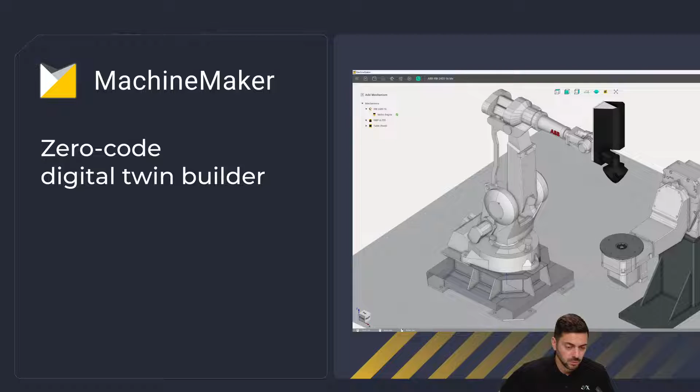So in order to program a robotic cell properly in offline mode, in the standalone software, you need to have a digital twin of this robotic cell. For this purpose, we offer a product called MachineMaker, which is a zero-code digital twin builder for robotic cells and CNC machines. CNC is not the topic today, but for robotic cells it definitely is. You can use MachineMaker to build whatever robotic cell you or your customer has, in order to program it with ENCY Robot.

MachineMaker features not only a builder but also a components library, available online. We're always working on adding more components, but it's also possible to build your own components with MachineMaker. If you don't find a component—maybe a robot, an end effector, or a positioner—you can build it yourself with MachineMaker, no problem.

The main application area for MachineMaker is to build virtual robotic cells or digital twins. That's obvious. And last but not least, MachineMaker provides user-friendly input of TCP and base calibration data. This is a completely different, separate topic.

I think if there's demand, we'll make a separate webinar dedicated to TCP and base calibration, because we have an app called Robot Calibration, an assistant for the double spike calibration method. Unfortunately, during this webinar I don't have the possibility to show you this whole process because it takes quite a lot of time to demonstrate. But if you want, we'll make a separate webinar—write it in the chat if you need it.

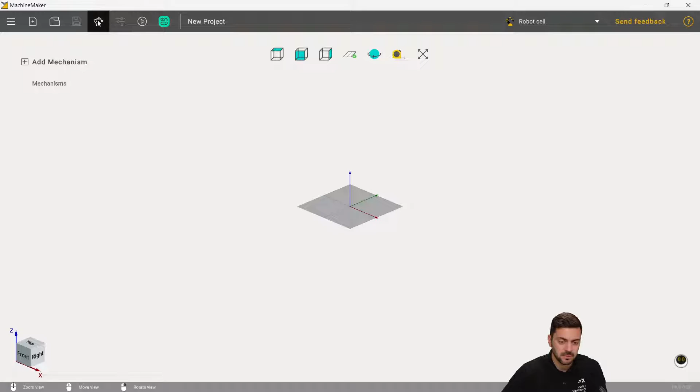I'll use the online library—you can find it here. Let's take a look at what we already have. For example, we have ready-to-use robotic cells. I can just open one and adjust it to my own taste.

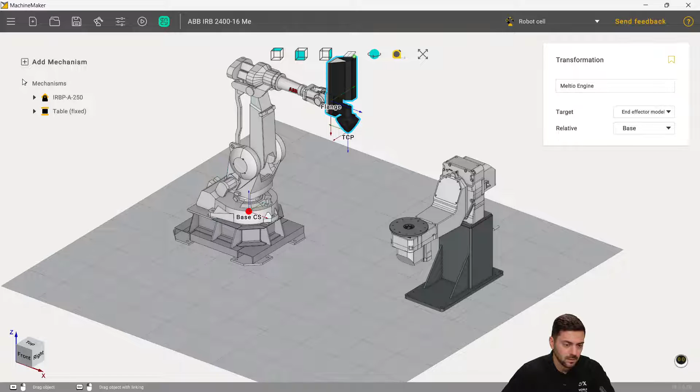All the usage of MachineMaker is very intuitive and user-friendly, so you can just drag and drop objects, or of course manually move objects like this. What's important here is that on the left you have all the kinematics defined for your robotic cell.

Let's say I'd like to add a new component—no problem. I'll just find some, let's say, whatever fence, and put it in my robotic cell in the correct position I want. This is very easy to use and a user-friendly tool.

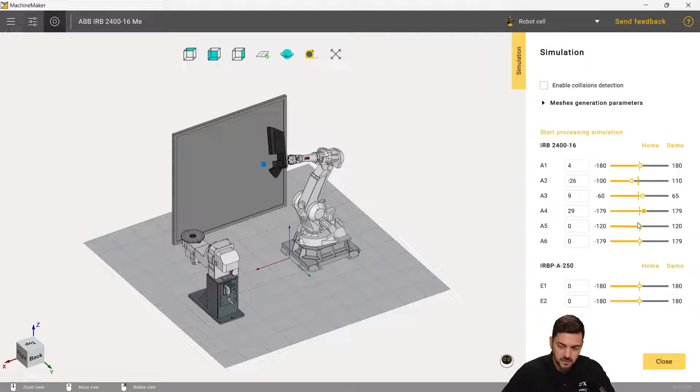And of course, we can move all the axes here—so it's not just a 3D model, it's a 3D model combined with a kinematics model, and all the objects here are already moving. You can check it, like this.

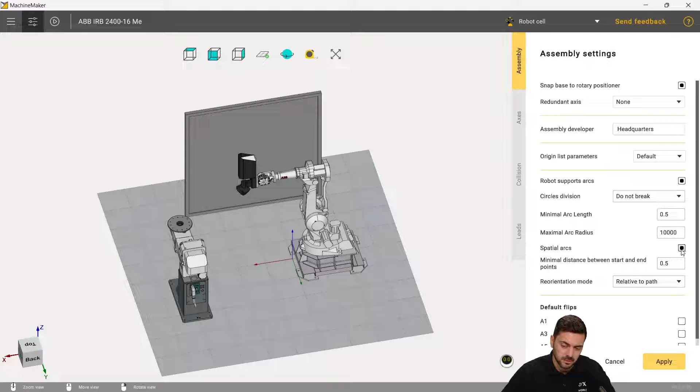What's also important in MachineMaker is that we have settings connected with what we call assembly settings, related to the behavior of different coordinate systems and axes during programming. For example, whether the robot supports arcs, yes or no—you can enable or disable it here. Does it support spatial arcs, yes or no, and so on.

There is also a section for definition of leads, or approaches and retracts. You can define your own approach and retract rules, which will be used by default, and add your own ones. So this is not only a tool used to put objects in the right positions, but also a tool to prepare your full digital twin, which is now available for programming with ENCY Robot.

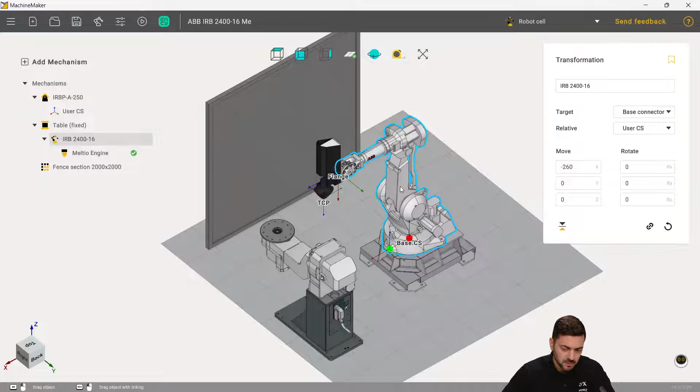What's important to say is that every component can be accessed with a double click. Here is the kinematics, so I can adjust the kinematics of any component. I can change dimensions, I can do whatever is required. All the measurements are editable, so you can change whatever you want. It's a powerful tool. Be careful, it's quite easy to destroy something, but it's also easy to use, so I think you will not experience many problems with MachineMaker. It's really easy to use.

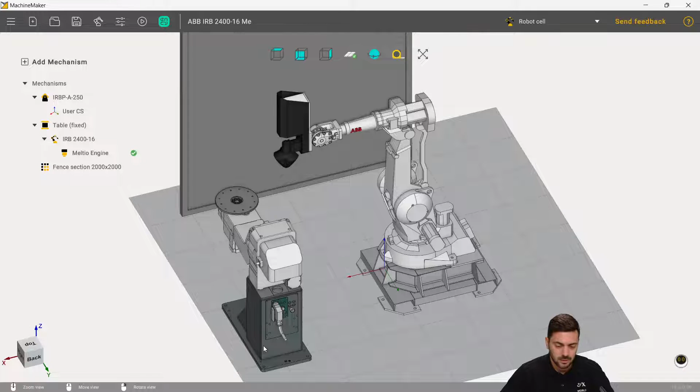We have seen many times that customers who just downloaded a trial version from the website have managed to learn how to build their own robotic cell, and during their trial period they already have their robotic cell. So they're testing the software not on some abstract robotic cell but on their exact robotic cell, and they can do it from scratch in maybe several days. So I think you also can do it.

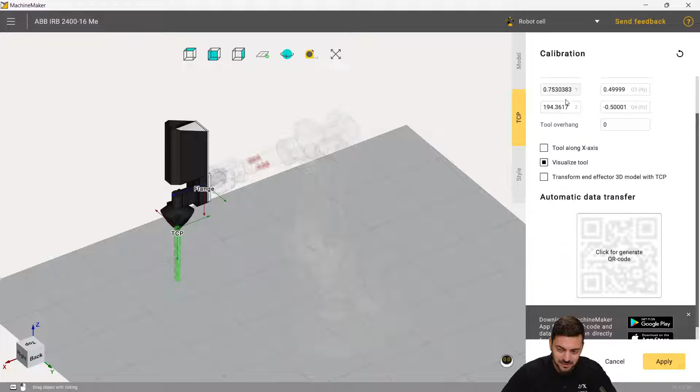The last thing I would like to show you now is that here you can also input TCP calibration data. Here you can see the QR code, which is made for automatic data transfer from the app, which you can download here, please try it. It's a really nice application which makes life easier, so you don't have to manually input 6 numbers, maybe sometimes even more, like here you have 10 numbers, 10 digits. So all this data is transferred automatically from the app, and the app is used to recognize the numbers from the robot controller. You just take a picture and transfer these numbers into MachineMaker.

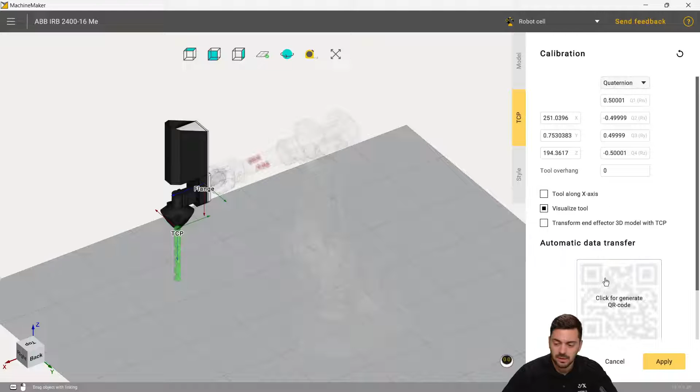Here you can also see that we have support of different types of robots. Some of them work based on quaternions, some of them work based on Euler angles, so everything is supported. In case we have some specific scenario or specific robot which for some reason was never requested by our customers, you can always send us a request, and if something is not supported, it's no big deal to add support for a specific robot. So feel free, if you don't find your Euler angle combination, for example, send us a support request. We will put this into MachineMaker and also ENCY Robot.

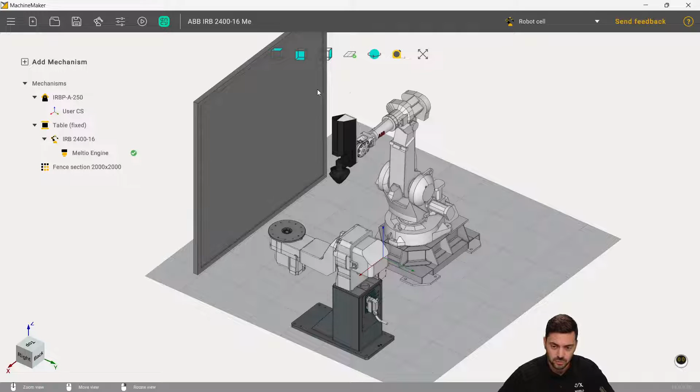The last thing I would like to show you concerning MachineMaker is that on our website encycam.com you can find a component library, and all the components are available. So you can check what we have in our component library and check the specifications, and here you can download the digital twin of the specific robot. But actually you don't need it, because you have the same library here. So if you have it online on the website, you have it here in MachineMaker, so you don't have to worry about downloading and loading something. Just open MachineMaker and use the same online library which you have on the website.

Concerning the trial version, I have the question. I will answer it right now. Yes, everything is available in the trial version. MachineMaker and all the applications, all the technologies in ENCY Robot are also available for trial. The trial has only the limitation that it's 30 days, and you cannot run the trial license twice on one PC. So don't try it.

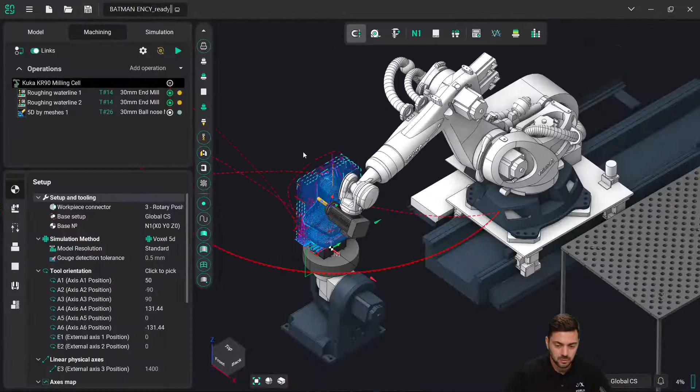So the next topic and next big section which I would like to cover is ENCY Robot itself. Let's take a look at the project, and on this example, what do we have here? On this example I would like to show you some really nice kinematic management and collision avoidance features which we have.

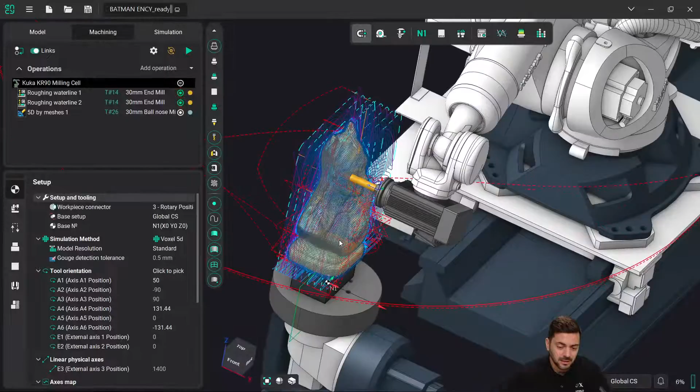But first, for those of you who have never contacted us before, I would like to say that for robot programming we have the full range of toolpath calculation algorithms for milling, for welding, for additive manufacturing, for probing, and so on. A lot of technologies are available, so you can program almost any robot movement, and also, which is very important, the end effector. Sometimes you have a simple end effector like this which has only on and off commands, maybe a spindle speed command, that's it. But in many cases you have a really complex end effector, used for example for additive manufacturing, so you can output commands which will also control the end effector equipment on your robot.

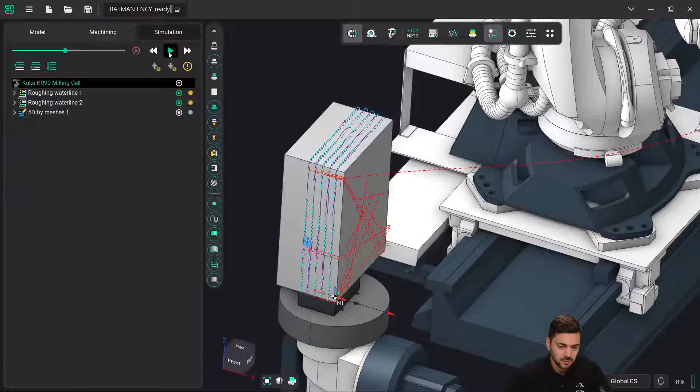Okay, so this is a milling project. Let's take a look at the simulation first. It consists of 2 roughing operations and 1 finishing operation. Looks quite simple, but if we take a look at this robotic cell, how many axes does it have? The robot has 6 axes itself, then we have a rail which is 7, and we have a 2-axis positioner. All in all we have 9 axes in this robotic cell, which is quite a lot.

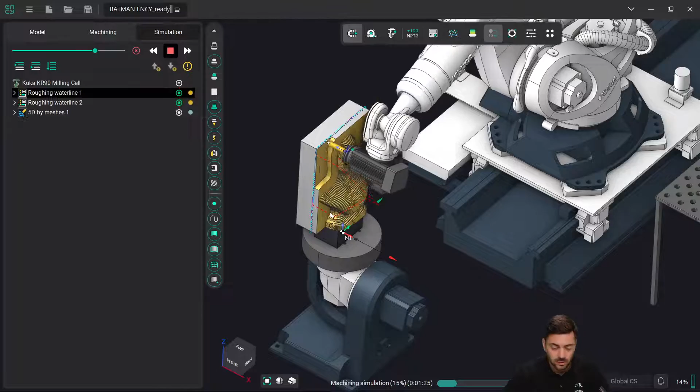The main challenge concerning robot programming, comparing to CNC machines, and the main difference is the kinematics management. Because even if we speak about 5-axis toolpath, it's only enough to have 5 axes to execute this toolpath. So what to do with other axes? You have like at least 6. So in this case, when you have additional axes, you have to define some algorithm which will control the redundant axis behavior during toolpath execution, which is not directly connected to the toolpath itself. This may look like quite a complex concept, but when you look at it in a visual way, you will understand very fast.

For example, let's take a look. Here we have 2 operations which are basically only 3 axes. So we don't even need 6 axes, and of course we don't need 9 axes to make this toolpath execution. At the same time, we can do the same toolpath in many ways. The robot can be configured in different positions and different configurations, and still execute the same toolpath.

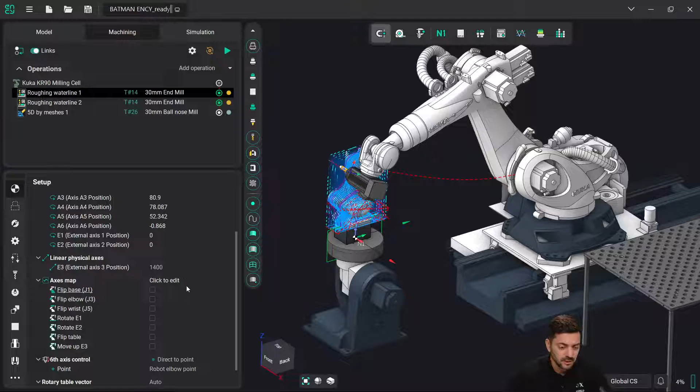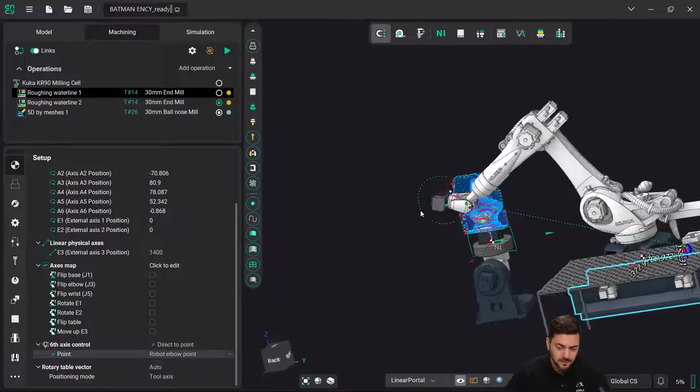In order to control this behavior of additional axes, we have several tools. For example, this one is simple. You can define the magnet point, which will be used to control the position of the 6th axis of the tool during toolpath execution. So you can say, I have the magnet here, so the 6th axis is controlled in a way so that it is aligned with this vector. This is quite an easy tool, but still very powerful. In many cases it's enough only to have this.

But there is also an option you can use in cases where you cannot use only a simple magnet, so you need to change this behavior during toolpath execution. For this scenario we have a robot axis map. It may look a little bit overwhelming, but once you understand the idea, it will be very easy to use, and it's very visual and very intuitive.

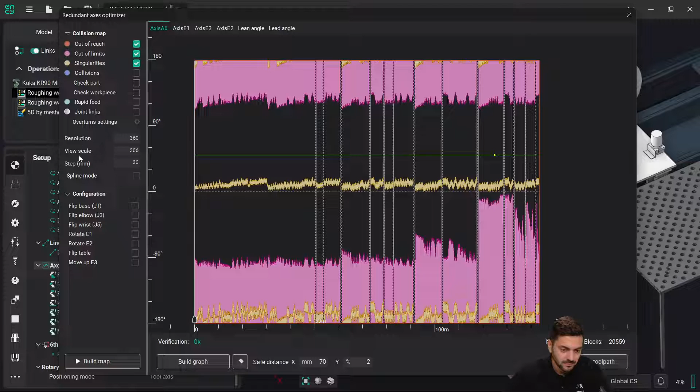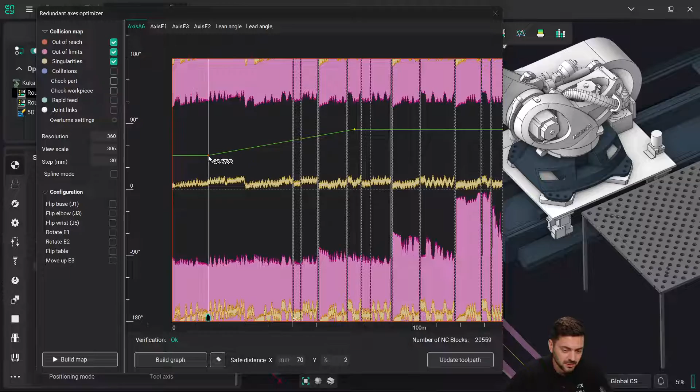So what do we have here on this graph? All the colored areas are bad areas. Along the x-axis we have the toolpath. Along the y-axis we have the angle of the 6th axis of the tool. This green line is the trajectory of the 6th axis of the tool, which you can define throughout the toolpath execution. It's very easy to understand when you look at the same time at the simulation, at the graphic window, and on the robot axis map, and move it like this.

So in every point I can change the position of the tool around the tool axis, and you can understand that the result of these changes will only be visible on the kinematics of the robot. The toolpath itself is not changing. So with this tool, you are not influencing the toolpath itself. You are changing the behavior or the kinematics of the robot throughout the toolpath execution.

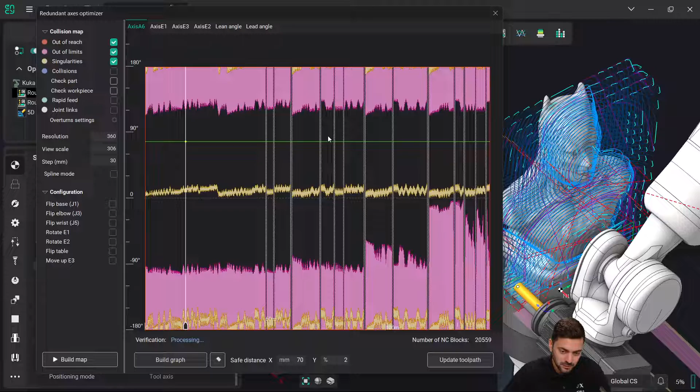And visually, the task is very simple. You need to go from left to right without crossing any colored area. That's it, a very visual tool. These gray areas are actually the links, the transitions. They are part of the toolpath, shown so you understand that in these areas you have non-cutting movements, for your information. So you can cross them, of course, inevitably. It's okay.

So with this robot axis map, you have full control over your redundant axis during toolpath execution. And you can change not only the sixth axis of the tool, but also the behavior of all the redundant axes, all the additional axes which you have in your robotic cell.

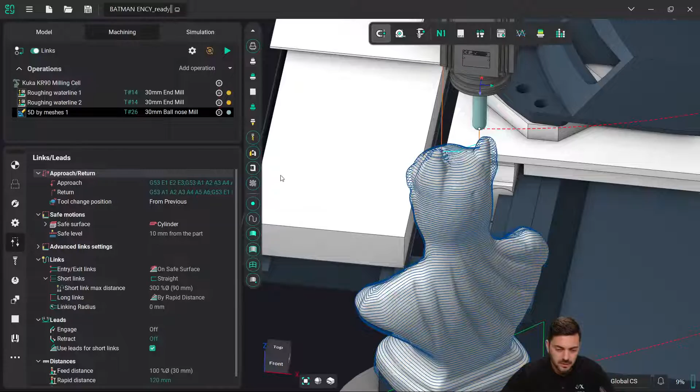So let's say we have this kind of process. First we make a roughing waterline from one side, then we have a roughing waterline from the second side, and we need to make a transition between these positions.

You can already see that on approach I have collision avoidance enabled. I will disable it for a moment, and let's see what happens.

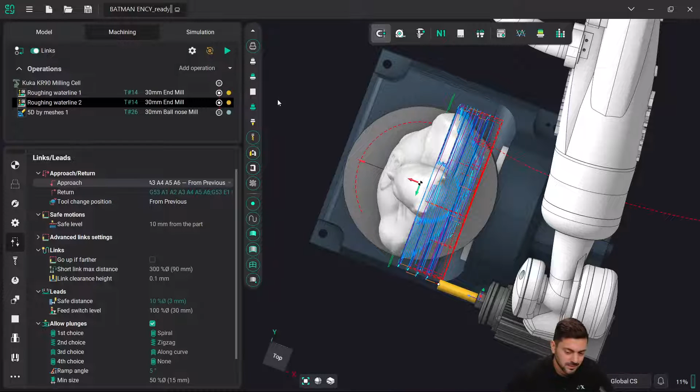In order to see, we are switching to simulation, and I will quickly go through the simulation of this roughing operation, which you can also enjoy. I believe it works very fast and very detailed. By the way, I will enable stop on errors so we can catch the exact collision situation and take a look at it.

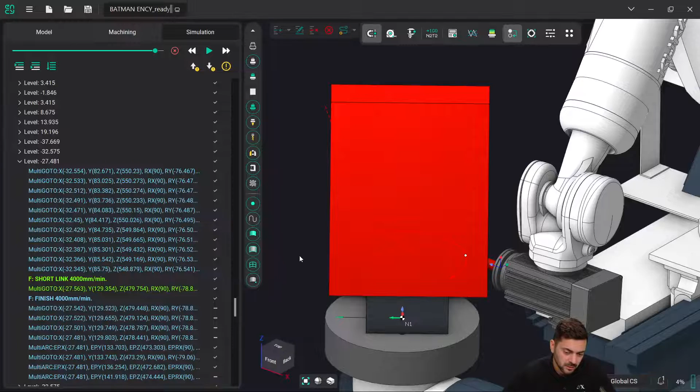By the way, for those of you who see our product for the first time, on the left you can see the program actually. This is the program which was calculated in the machining tab. In the simulation you can simulate the program you have just calculated. So this program is already usable for this particular robotic cell, so you don't have to use some other software to transform your toolpaths for robots. ENCY Robot is a complete solution, so you don't have to use any other software to adapt your toolpaths for the robots.

So we have a situation. This is definitely a collision. The collision avoidance algorithm detected the collision and tells us, okay, we have a problem here. So how can we solve this situation?

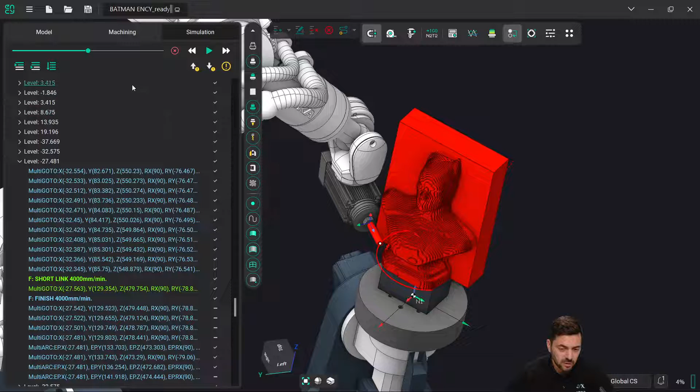There are many ways of how we can do it, but the most easy and effective is to use automatic collision avoidance. So I will just avoid collisions and recalculate the toolpath. We'll have to wait a little bit for toolpath calculation, sorry.

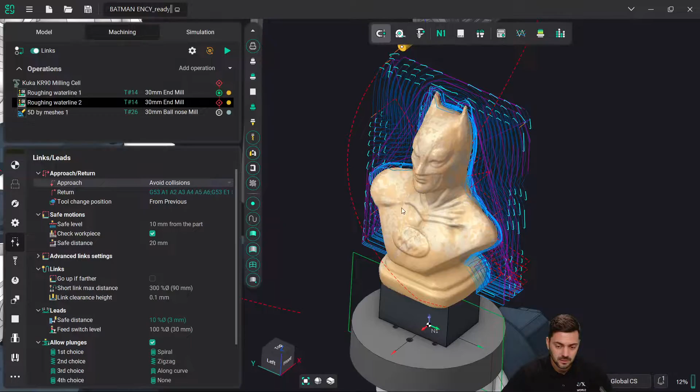So basically what this collision avoidance algorithm is doing is that it detects the collision during the transition, and it's looking for new points and adds new points to this transition so that it becomes collision free.

What's important to know about collision avoidance: please do not use it everywhere, because it will inevitably increase your toolpath calculation time. In order to use it in the most time-effective way, just enable it in those transitions where you have collisions.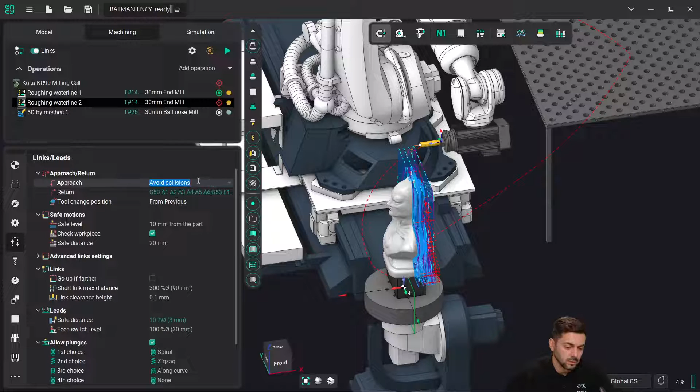For example, in this operation, we have collision at the approach, but we don't have any collision at the return. So we don't need collision avoidance at the return, we need it only for approach. So I will reset the status, and now let's take a look at this approach.

You can see now it's different. Instead of just one movement, there are now several points, and it gradually moves, avoiding collision with the workpiece. Let's take a look at slow speed how it looks now.

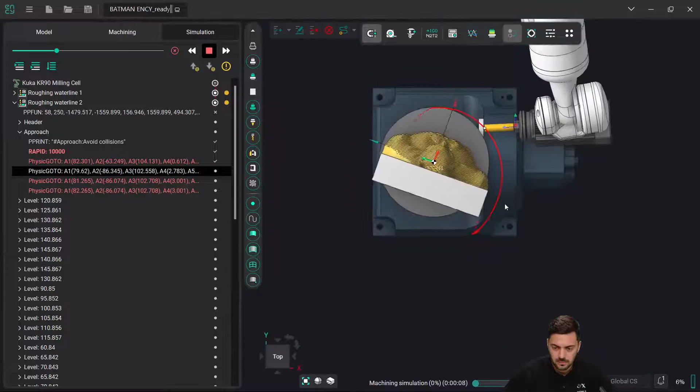It may seem to you that here the distance is too small, so you can put this safe distance, put here a bigger number, and you will get bigger clearance between your objects.

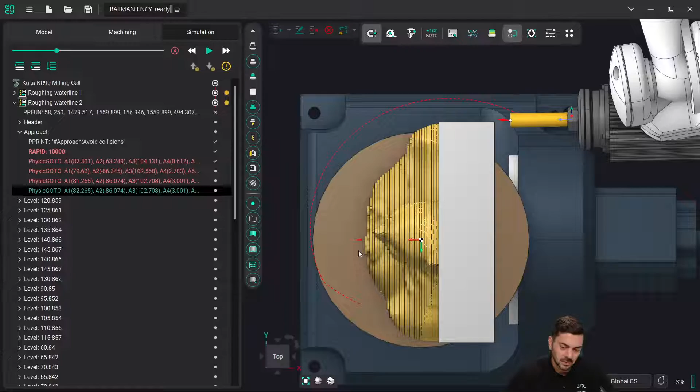What's important to say is that this collision avoidance algorithm takes into account all the objects within the work area, including the current state of the workpiece. It's very important, because your workpiece may change during toolpath execution, and collision avoidance should take into account the current workpiece state. So exactly what we can see on the screen, exactly this shape, is taken into account for collision avoidance.

Okay, and now we can run the second roughing part. Very fast, and after that I will show you the last thing in this project, and we will switch to the next one.

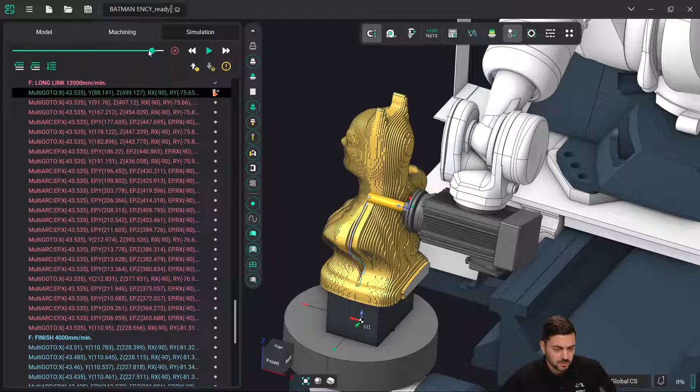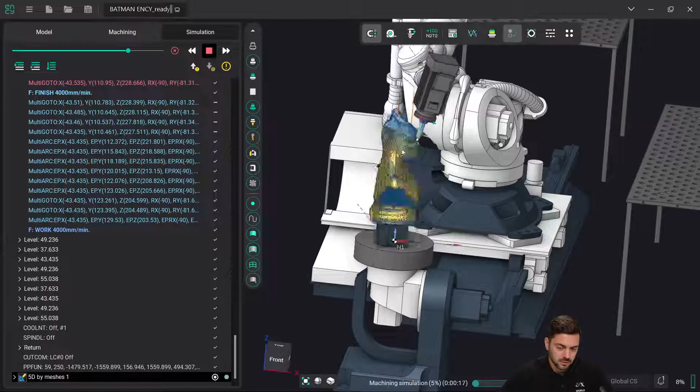So after the roughing is done, the next stage of this project is actually the finishing. The finishing is a completely different situation, because it's a 5-axis toolpath which includes rotation of the table and also inclination of the tool, so that it machines this shape, which is very complex for a CAM software, and we still have no collisions.

By the way, you can always control your robot movement with your control panel. You can see all the 9 axes here, coordinates. So of course now we have a 7-axis toolpath. Our E1 and E3 are not involved in this toolpath execution, because we simply don't need it, but all other axes are working simultaneously. So you can control it in the machine control panel, which I believe is quite spectacular.

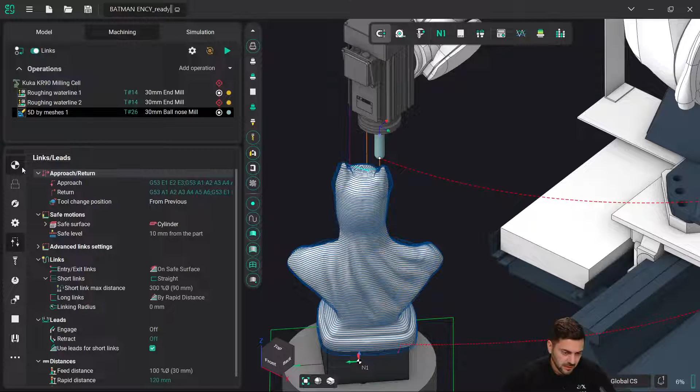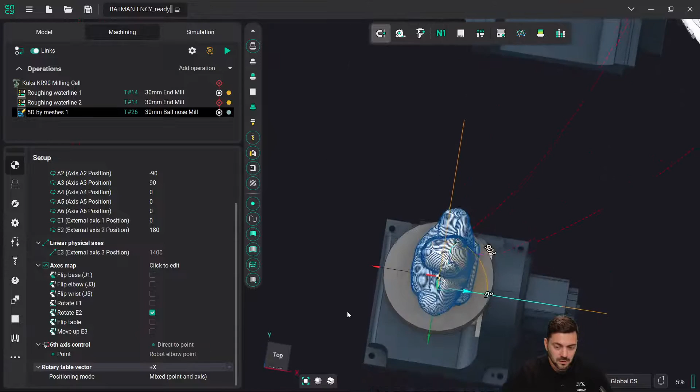So what do we have here for kinematic management? Due to the fact that this toolpath is 5-axis, and we want to optimize the execution so that the robot is not going around the workpiece, but as much as possible stays on one side approaching the workpiece, all this round movement is done via the rotary table. So we engage rotary table rotation here, and we must define this rotary table vector. This blue vector defines from which direction the tool will approach the workpiece, the table.

So you can change this vector, set to +x, or you can put a custom vector. You also have a positioning mode, which is another flexibility that can be very helpful in different situations. You can position the tool axis, tooltip point, or mixed. Try it at home, I advise you, and you will see the different behavior of the robot during toolpath execution.

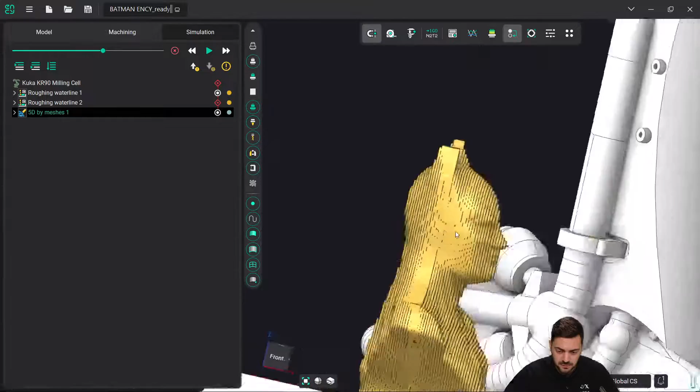If we take a look at the simulation, let's set it up like this. This is the workpiece which we have after our roughing operations, and if we run now the simulation of this finishing operation, we will see. Let's move it a little bit faster.

We can see that the tool contact point, this white one, is aligned with the x-axis. It is now moving according to the rule which we have defined in the rotary table axis parameter.

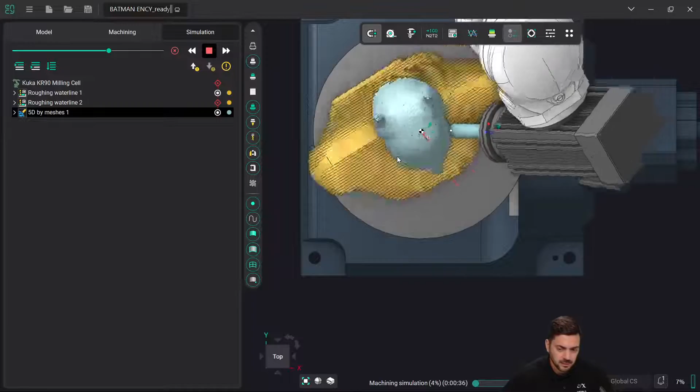So all these tools are made to define some additional limitations or rules for redundant axis. This is specific for robots. Sometimes CNC machines also have this necessity, but mostly this is done for robots.

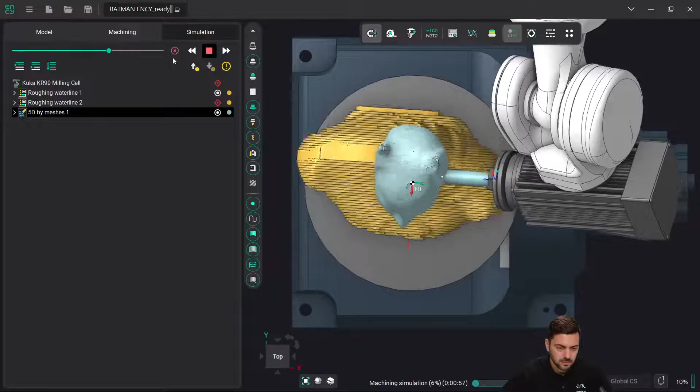Very nice to look at, but we should switch. From the first point of view, this is a really simple project. We have just a big cylinder and we need to make these little holes in it, so we have only one operation for drilling, and also here we have a rotary table.

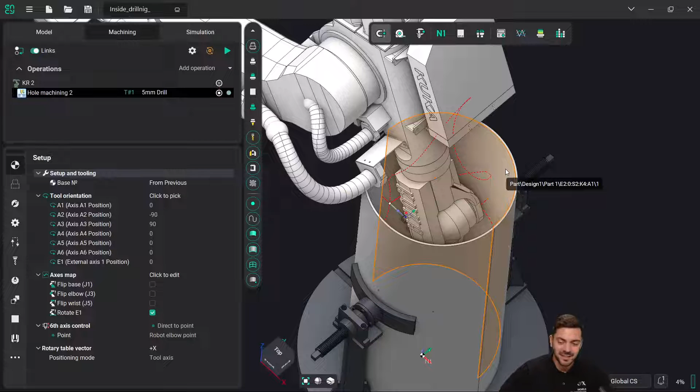It might seem easy until you understand that you have to manage the approach and the retract in this situation, when you have a very tight area inside this tube and a very big robot which must fit there and not crash during this movement.

This is a very nice example of how collision avoidance is working. So first I will turn it off and we will see what happens.

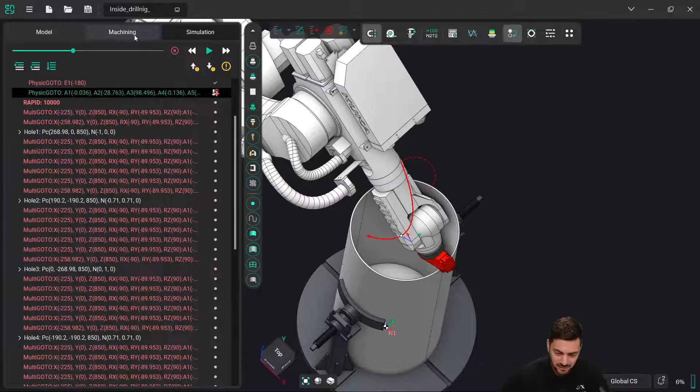All seems okay, but when we start simulation, we have a problem here. The problem is not only that we have the collision, but also we have a 7-axis movement simultaneous. I don't think you want to program this by hand in any scenario. Of course, you can move it one by one, but it will not be time effective.

So in this situation, the perfect solution is a collision avoidance algorithm. Let's engage it and calculate the toolpath again. Now, like you see at the bottom, we are eliminating the collisions. After that, in our approach, we have several movements you see now on the screen, which are helping us to avoid the collision.

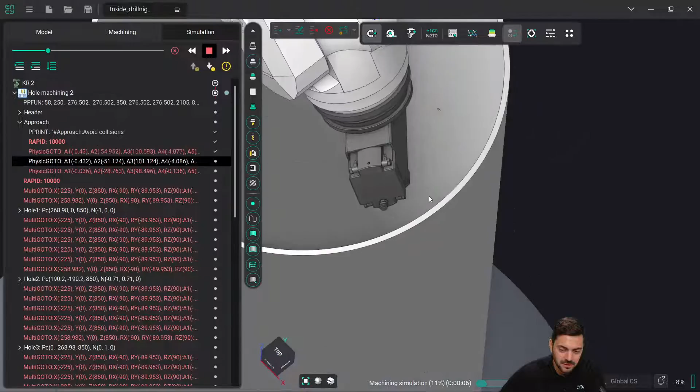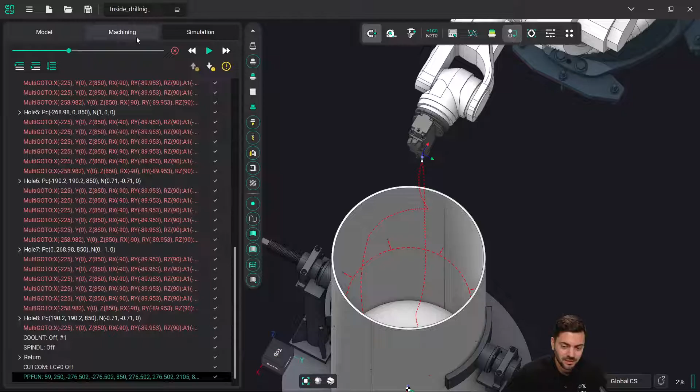And the robot fits in a very tight area. You can control in simulation with very high precision how the robot is moving inside this workpiece and making the machining. This is an example of how you can save a huge amount of time just with a couple of mouse clicks, when you need to use your robot within really tight areas and maximize your robot's potential to reach really hard to reach points or areas in your project. So that's it.

Now something new which we have not shown before, and this is a new feature for ENCY: weaving. Weaving for welding first.

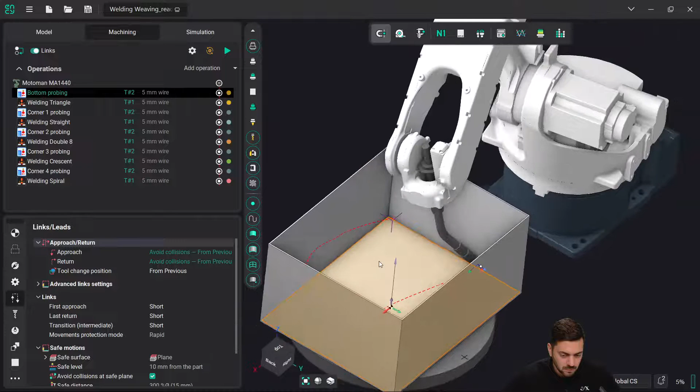So before that, for quite a lot of time, many years, we've had our welding robot operations in our software. But now we have implemented this weaving feature, so you can add different weaving patterns in your toolpath, and they are simulated, so the collision detection is working for them also. In these tight areas, when you have the nozzle of your welding torch, you can control so that it is not touching your workpiece in any scenario.

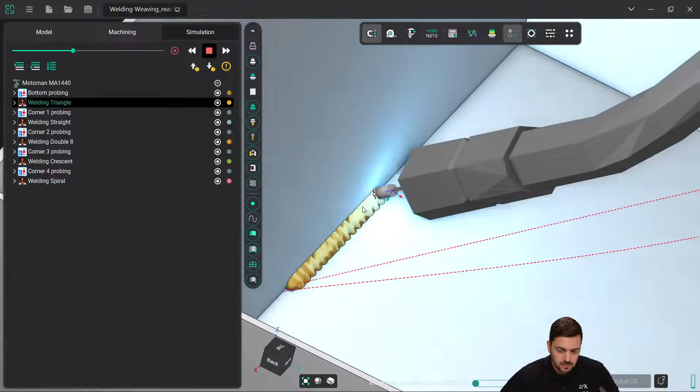Let's take a look at how the simulation works. I think it's quite intuitive and visual, you can understand anything. Also here, the additional axis is involved into machining to optimize robot movements.

In this project we also have touch sense and different weaving patterns. We can also see the weaving itself. Let me show you — the touch sense is finished, and the weaving toolpath itself can be observed.

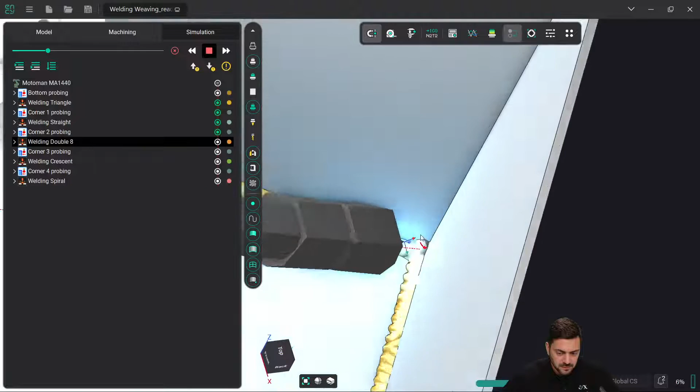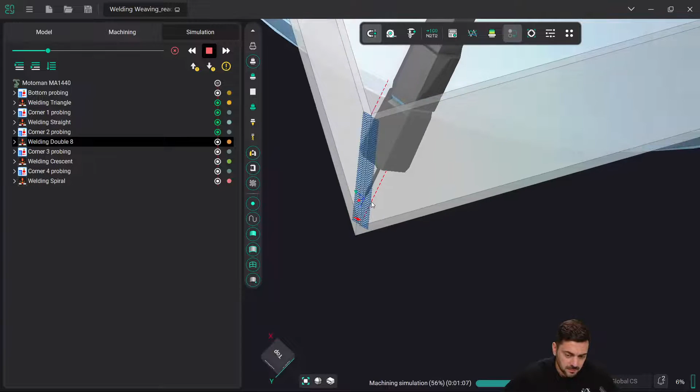Let me just make it like this. I will put some transparency because it's inside of the part, so you cannot see it otherwise. You should either disable your part visibility or enable transparency so that you can see from the inside. Okay, we have double 8 here. So let's have a quick review of what other weaving options we have.

So here we have triangle, trapezoid, spiral. Let me show you the pictures also. So triangle, trapezoid, spiral, double 8, curvy, crescent, and you have the parameters to define this geometry.

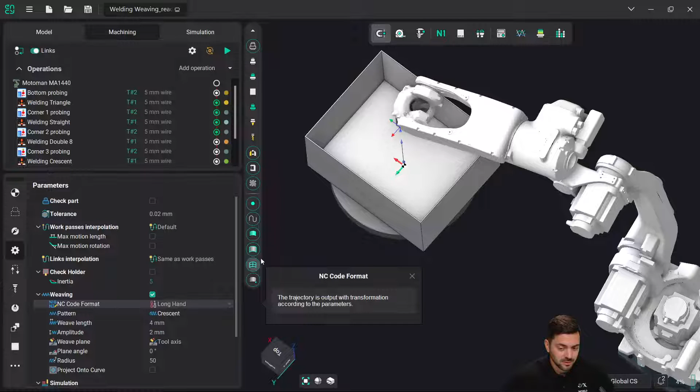Also, what is in our opinion important for welding is that you have an option how to output the NC code, the control program. Either you can export NC code longhand or in a cycle. I believe for welding you will be using cycles because the welding system itself has cycles and it's better to use these cycles. But when using these cycles, you still have the possibility to simulate the welding with weaving, which is very important. And also define the parameters here, and then in the post-processor you will use these parameters for definition of the welding weaving cycle.

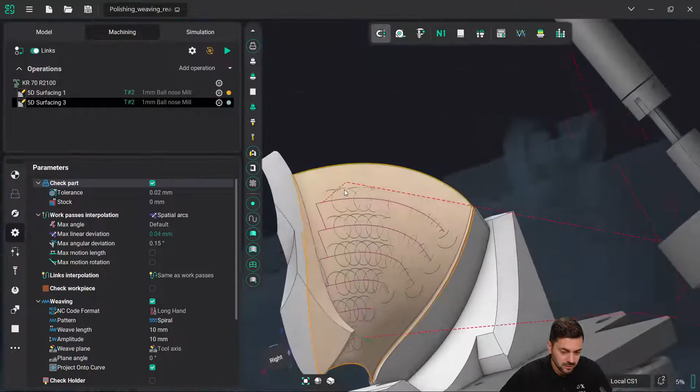Another application for weaving is polishing. Polishing is a different animal, while welding can also have a very complex shape of the surface, but for weaving, for polishing, you will have a really complex surface shape, I think, always.

Let me also turn on transparency so that we have the toolpath visibility. What's important, and the difference between weaving for welding and for polishing, is that for polishing we have this feature which is projection of the weaving onto the surface. So all these weaving patterns are now projected and aligned with the surface in every point, so you have a really quality toolpath for polishing with this.

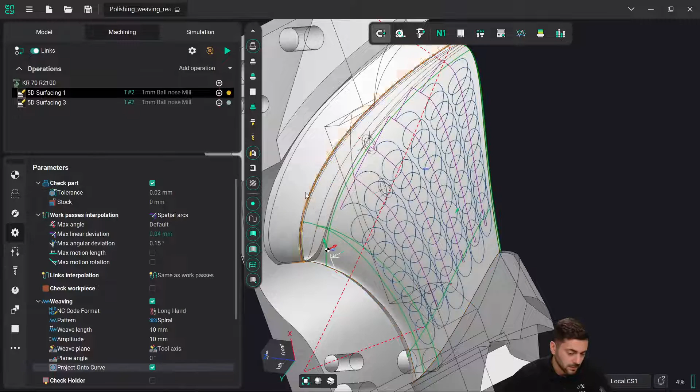Let's take a look at simulation really fast. I will disable machine collisions because it's a polishing toolpath, so the tool is inevitably, you see, trying to go to the part if you speak in terms of material removal, but we understand this is a soft tool and we don't need this collision detection. So this is weaving.

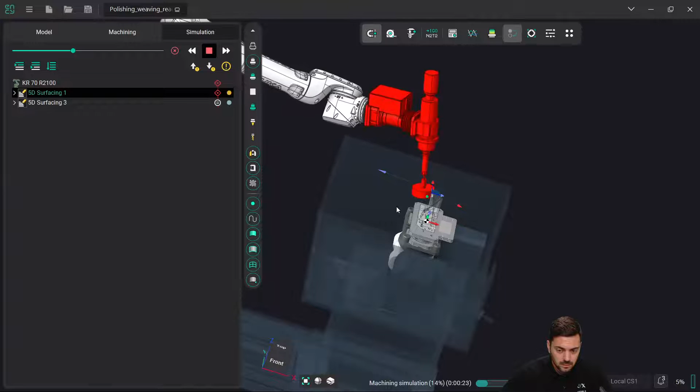You can see that the robot movement is very complex, but it's programmed really easy, so you don't have to do anything manually. You just define your weaving pattern, geometry, and you have the result.

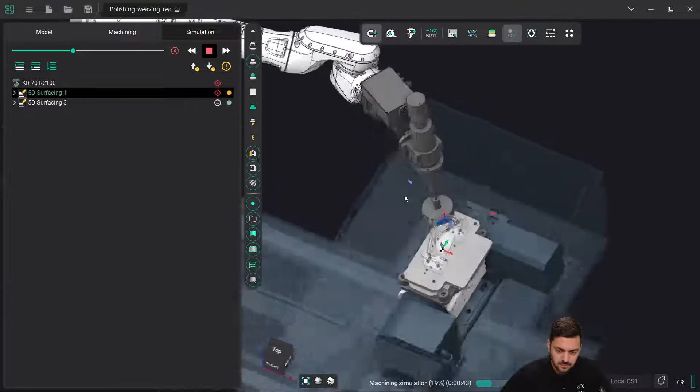So don't worry about this red collision detection, I just didn't turn it off for this demonstration. In this particular scenario, the part itself is very complex. It's some kind of blade, or I don't know what it is, but it's a very complex shape of the surface, and all the weaving pattern is ideally projected onto the part so that your toolpath is correct for this particular part, so you will get good quality for this particular case.

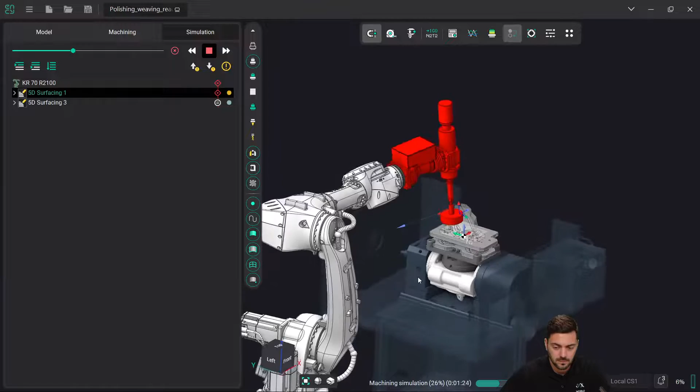To me, it looks very nice. Yeah, all the robot movements. We can also engage the machine control panel, so we understand what are the coordinates.

Okay, we can look at this forever, but we have limited time, so let's switch to the next thing. This is additive, non-planar additive functionality. This is also new, so let's take a look quickly at the project. I would say that we are still working on development of this algorithm and this slicer, but it's already here. You can use it, and it's really powerful.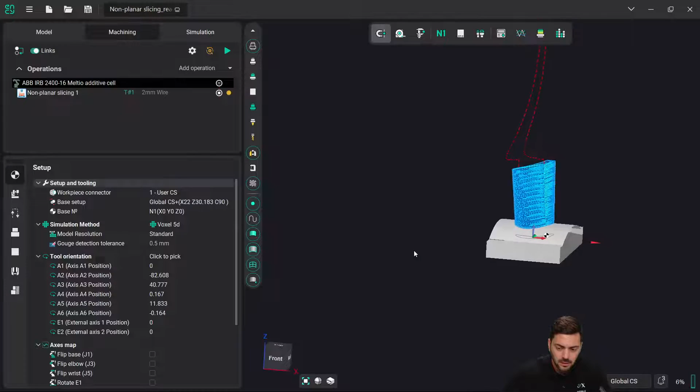So what we have here, let me turn this on, is we want to create or build with additive technology this complex shape on this non-linear, non-planar surface. So non-planar slicing is generating non-planar levels and infills. Very easy to understand when we look at the simulation.

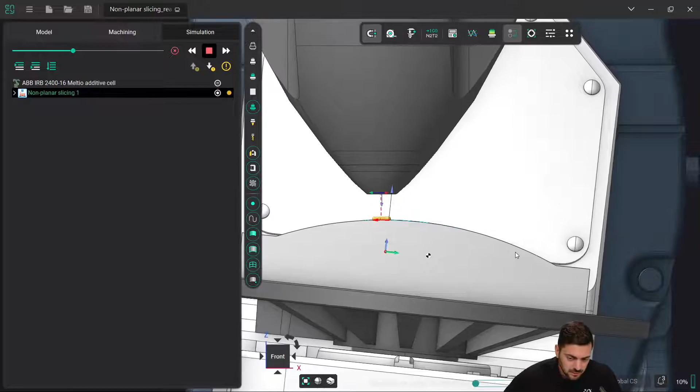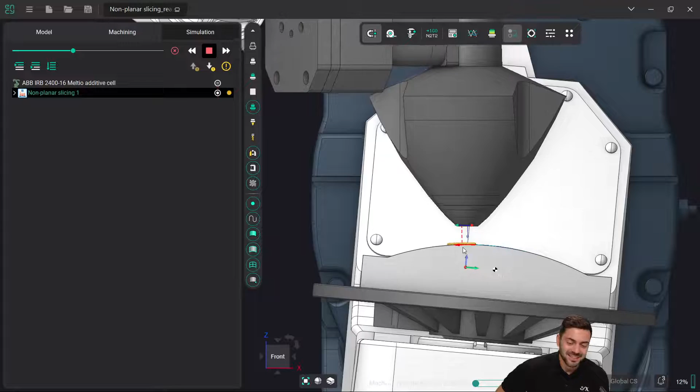Another interesting thing I must mention is that we can also define the kinematics of the robotic cell so that the tool axis is always vertical, because of the requirements of the additive manufacturing process. Due to gravity on Earth, in many cases we have to preserve the orientation of the tool axis for additive manufacturing strictly vertical. In this case, we have this two-axis positioner, which helps us preserve the tool orientation vertical.

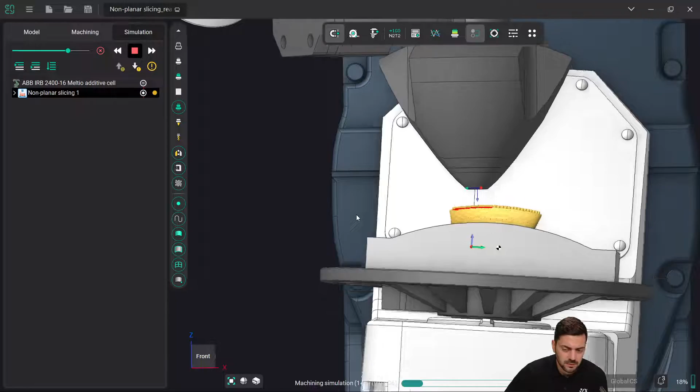While we're looking at the simulation, I would like to say that all the algorithms, all the toolpaths, and all the simulation algorithms are our proprietary algorithms. We don't use any third-party algorithms here, so everything is developed by us, and we believe this is the correct approach, because only by having control over all source code of the software can we provide a really good solution and maintain the quality.

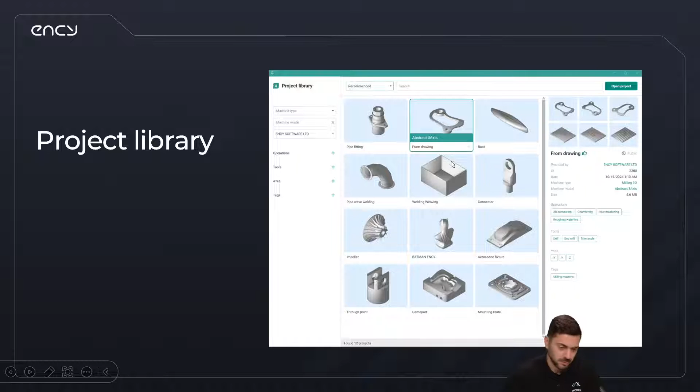So all the projects which I'm showing you, and even more of them, are available in the project library, which is an online project library for different purposes. You can install the trial version of ENCY Robot today, and let me show you, open the project library. Very easy.

Sorry, my PC is struggling with all this streaming software sometimes. Okay, so you have this project library. It's available for trial users also, and you can check all the projects I was showing you today.

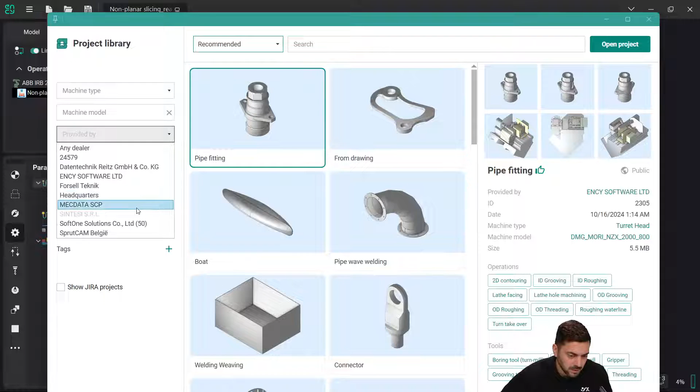Let me make it a little bit smaller. Okay, if you choose recommended here and provided by ENCY software, like this, you have this welding project, another welding project which is more interesting, the Batman project, and other projects which I was showing you today.

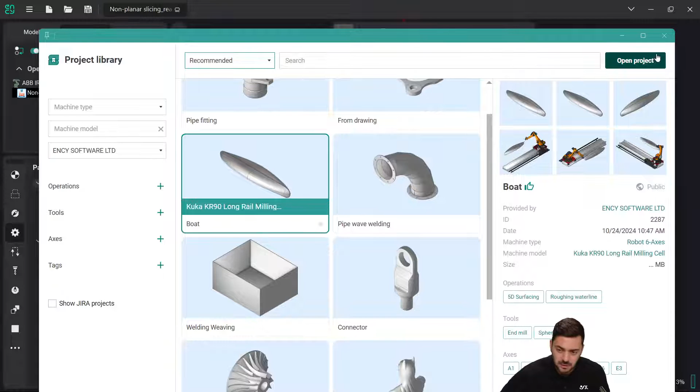So please feel free to explore these projects yourself. You can just click open project, it will download and open in your ENCY Robot instance within a couple of seconds. If you want to explore a bigger amount of projects, you can switch to all projects. Here we have 400 different projects, so you can explore yourself, and we have some filtering possibilities. Feel free to install the trial version of ENCY Robot and check all the demonstration projects in the project library. It's available for you if you have a trial license.

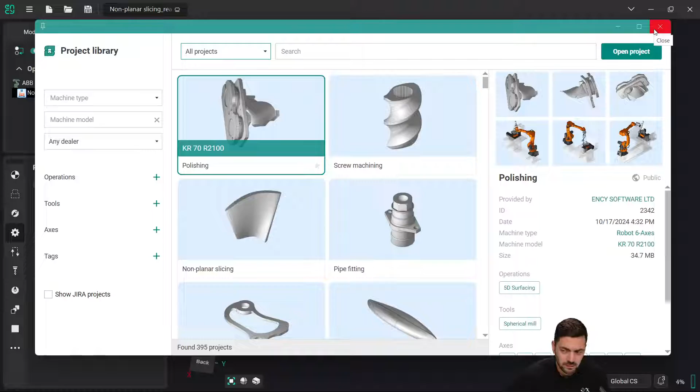Last thing I would like to say for now about additive manufacturing is that it makes no difference to us what kind of operation we have. In one project, we can have both additive and material removal operations. So in one project, you can create additive and finishing with some milling tool, for example, for one part, and you need only one software for this.

I would like to say a couple of words about what else we offer. ENCY Robot is okay, but what else do we have, you may ask, and I would like to answer this question. Besides robot programming software, which is one of our main products, we have a cadcam software for CNC machines programming also, which is called ENCY. So if your machine shop has robots and CNC machines, you can use one software to program them all, and it's a huge benefit, we believe.

I must say that our robot programming software grew from our cadcam software, and cadcam software is the area we've been working in for 30 years. We have a really outstanding product, I think you understand it.

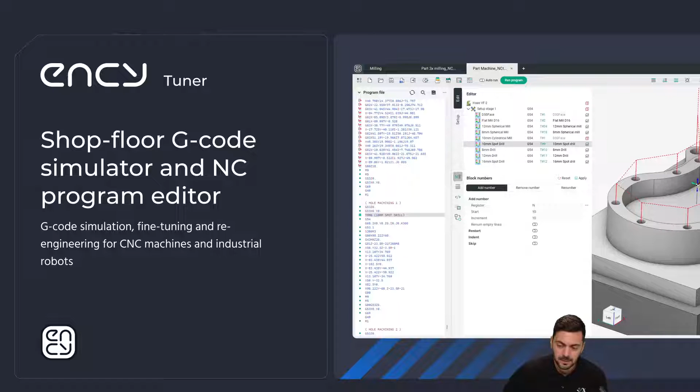Next, we offer ENCY Tuner, which is a shop floor G-code simulation software and editor. This software is natively integrated and has native compatibility with ENCY Robot. So you can import ENCY Robot projects or ENCY projects in ENCY Tuner and have the simulation on the shop floor near your machine or robot. This is highly demanded by bigger, or mid-size companies, which have separate cadcam office and shop floor, and which have several machines and robots.

All in all, I would like to say that we offer not a traditional cadcam software, but a cadcam ecosystem for a modern machine shop, involving not only toolpath calculation, simulation, post-processing, verification, but also transferring NC code from cadcam office to machine and robot operators. All this ecosystem is connected with the cloud collaboration tool, which is a completely different topic. I would just like to mention it today. I think we will make a separate webinar dedicated to the cloud collaboration platform, but to have a rough understanding of the whole picture, I'm telling you about it today.

For now, this is it. I have run out of time. So thank you for your attention. Now I will answer your questions.

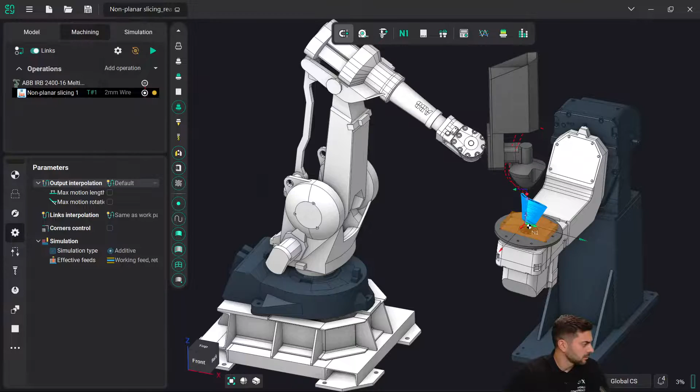Sorry, and here you have a snapshot manager. You can check the screenshots and the operations, so you can find your snapshot better in the history. And here is the pin button, so you can pin your favorite snapshot so you don't lose it in the history. Okay, let me switch back and let's continue with questions.

Can we also see how to do this from scratch? You can see how to create projects from scratch. Of course, I could not do this during this demonstration because it would take some time, but please visit our website and in the Learn section you will see the lessons. There are not a big amount of them by now, but we are working on adding more and more lessons, and these lessons are made specifically to guide you by hand, step by step, to create projects from scratch, from a completely blank project until the end.

For the good question about polishing, can you use force feedback? By now, the answer is no, because this solution, ENCY Robot, is an offline solution, so it is not working directly with the equipment. It's only working with a digital twin.

But there is an option. You can use some embedded algorithms in your controller for feedback, like real-time correction. And we are also working on online robot programming software, but it's a completely different topic. I will not tell you much details about it right now, but please keep in touch with us, because I believe in some time we will make a very big announcement concerning a hybrid robot programming approach. That's all for the moment, so everything I can tell you now.